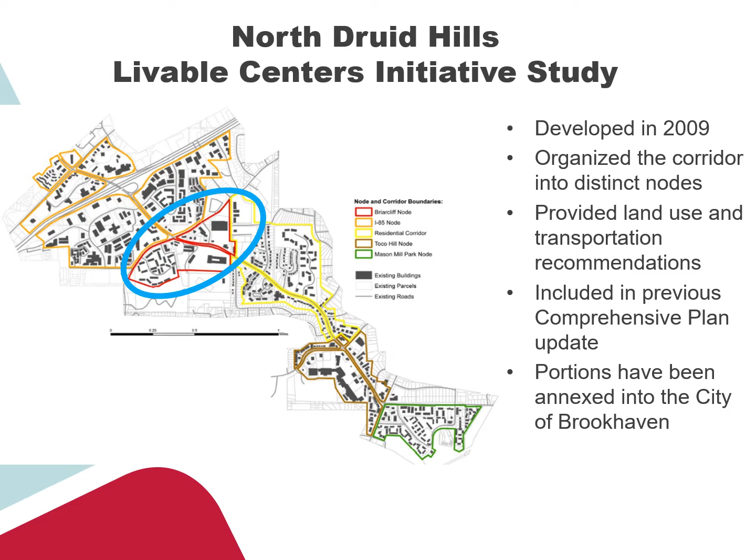The Briarcliff node, as delineated in 2009, included only the area just north and just south of North Druid Hills Road on the east side of Briarcliff. So that includes a series of apartment complexes, the DeKalb County school site, including Adams Stadium, and a series of retailers on the north side of North Druid Hills Road from the Chick-fil-A over to the Target.

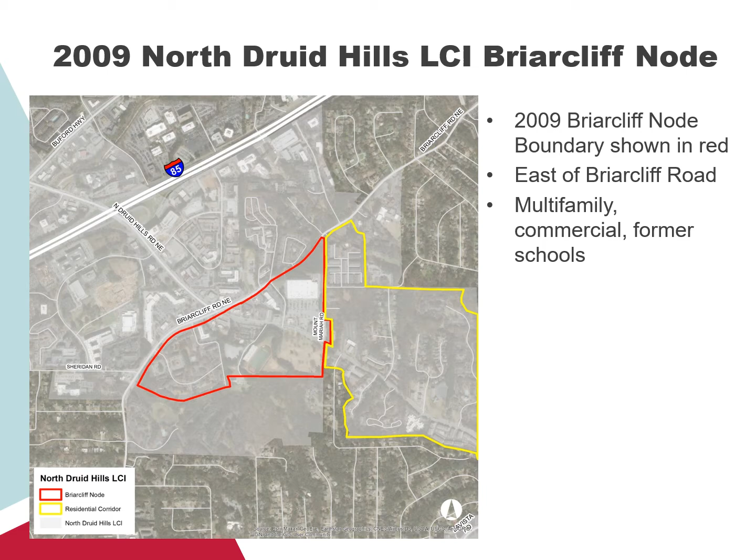Part of the intention of the Briarcliff node in the 2009 plan was to serve as a transition area between higher intensity development to the west of Briarcliff Road and near I-85, and single family neighborhoods that are farther east in North Druid Hills. However, over the last several months, the city of Brookhaven has now annexed much of the property that was in the Briarcliff node.

Those properties that are encircled here in the red dashed line, including the Boston Market and the QT gas station on the south side of North Druid Hills Road, and most of the retail properties on the north side of North Druid Hills Road. So what's left of the Briarcliff node today really is not much of a transition, as the very core of the district is now part of the city of Brookhaven and under the guise of that city's zoning regulations.

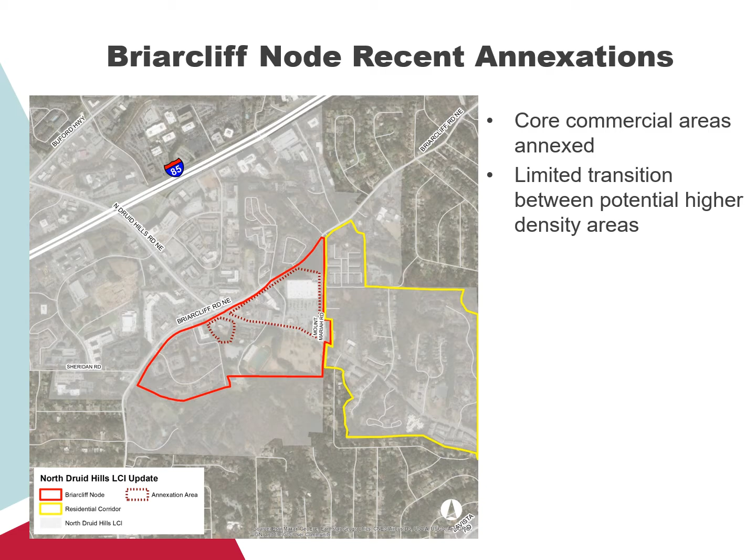So one of the primary objectives of this master plan update is to reorganize the Briarcliff node in a way that it can still continue to serve as a transition area in unincorporated DeKalb County between higher intensity development, most of which is now within the city of Brookhaven, where building heights of 10 stories are being allowed, and higher intensity multifamily development, and that transition to the single family areas to the east.

So what's being recommended in this plan update is to reorganize that Briarcliff node and include properties farther to the south that include Kittredge Park and other multifamily development, as well as a few additional properties to the north of North Druid Hills Road, including the collection of churches just east of Mount Mariah Road and a few of the residential areas that are north of Briarcliff Road that are all sort of encircled by multifamily residential today.

The goal of reorganizing this node again is to establish a reasonable transition area between commercial, higher intensity development west of Briarcliff Road and now right at the intersection of Briarcliff Road and North Druid Hills, and our stable single family neighborhoods to the north, to the east, and to the south.

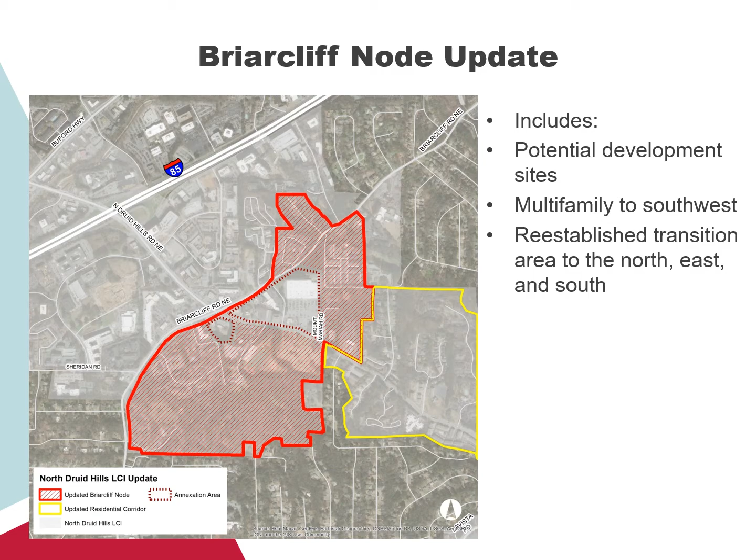This idea of reorganizing and resetting that transition is really apparent when you look at the amount of development that has recently been approved within the North Druid Hills corridor area, particularly between I-85 and just east of Briarcliff Road.

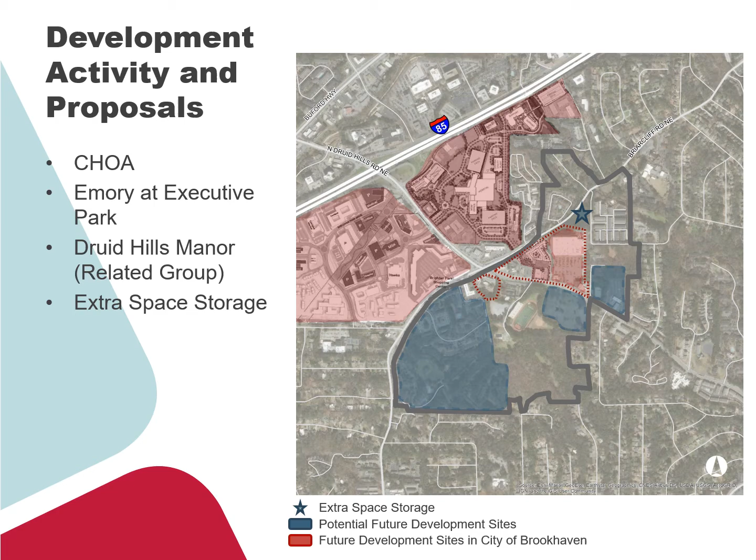The reason for this plan update really is to think a little more forward about these areas that are likely to redevelop over the coming years and reset some community expectations in a way that preserves and maintains an appropriate transition that protects the single family neighborhoods to the north, east, and south, but also creates opportunities that are viable from a market perspective that might prevent or at least encourage some of these properties to reconsider not being annexed into the city of Brookhaven, but remaining in unincorporated DeKalb County.

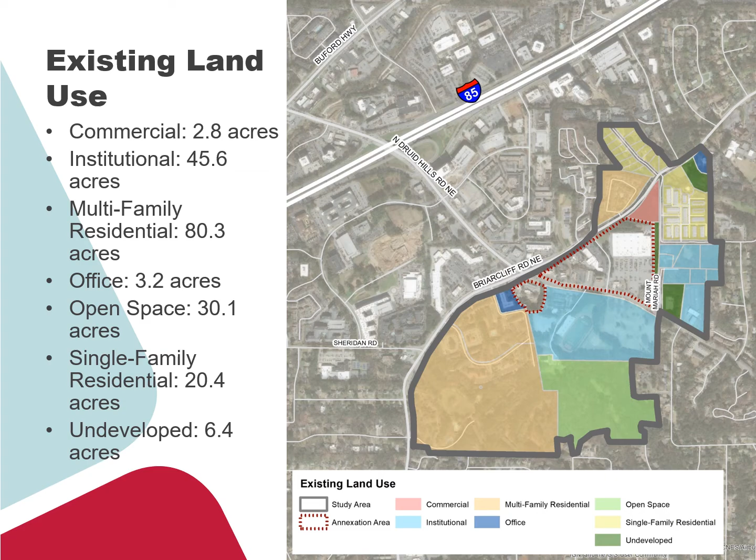Now, in the current DeKalb County Comprehensive Plan, this area, the Briarcliff node, is identified as a neighborhood center. So throughout the area that is the neighborhood center today, development can be 1 to 3 stories in height and up to 24 units per acre for multifamily development.

In working with the stakeholder group that is comprised of neighborhood residents and leaders from the surrounding area, we've really felt like the appropriate path forward is not to codify this as one single activity center, but to have a series of sub areas within it that seek to tailor the needs and the regulations to each specific area within the Briarcliff node. So to do that, we're recommending a series of 5 sub areas.

What's important is that north of that creek and sort of north of Sheridan Road, it probably makes sense that it would not only be multifamily residential, but also include a commercial or an office component. But the stakeholder group has felt strongly that what we don't want to see there is a retail shopping center or a big box strip center.

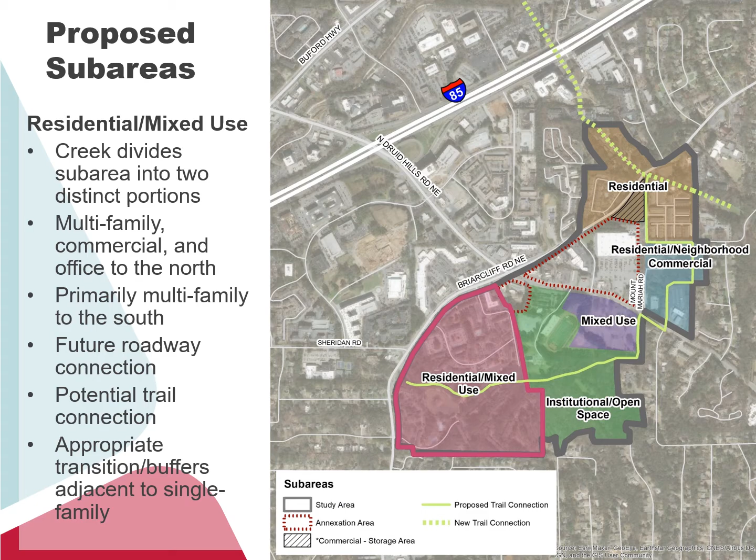While it's not shown here on this particular map, we also think it makes a great deal of sense for the county to work on these properties as they redevelop to provide a roadway connection from the intersection of Sheridan Road and Briarcliff Road through this redevelopment area and north of the creek over to the school site or Adams Stadium, providing a local roadway and potentially a local trail connection for residents to bypass the Briarcliff Road at North Druid Hills intersection and access the south end of Briarcliff Road and the east end of North Druid Hills without going through that intersection.

As we move to the east, the plan update outlines a second area referred to as the institutional and open space area. This includes Kittredge Park, the pool area operated by DeKalb County Parks and Recreation, as well as the Kittredge Magnet School currently and Adams Stadium. The stakeholder group sees this as an opportunity to preserve and enhance institutional uses and access to open space within the surrounding area, again looking for ways to provide trail and roadway connectivity through the site while preserving it as an institutional and open space anchor within the district.

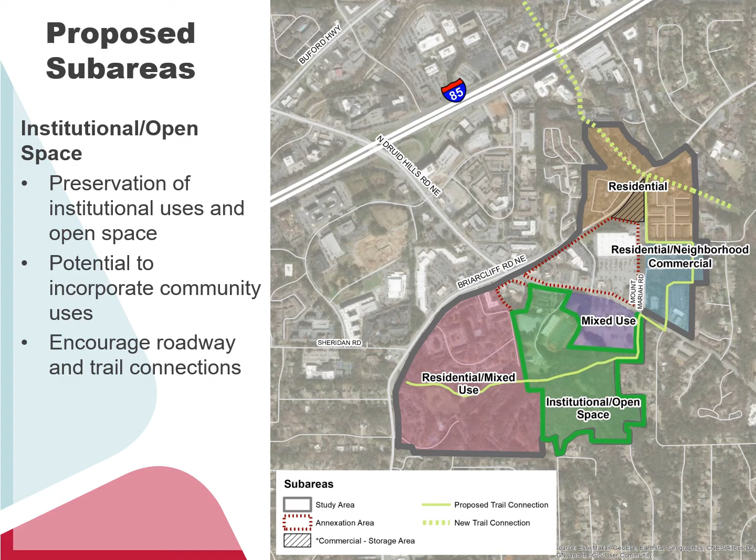Looking at the next sub area, we'd be remiss not to recognize that the prior school site is a potential redevelopment site. There's a lot of history with previous developments proposed in the area, with concern that those were out of scale and character for the surrounding neighborhoods. So, working with the DeKalb County School District and stakeholders, this area is being listed as a mixed use area—a mix of residential, commercial, and office—with recommendations and standards to push higher density toward the west end of that parcel, closer to the stadium and Briarcliff Road, transitioning down as it moves east toward the single family neighborhoods.

To encourage an appropriate transition and buffer to the single family area, we recommend, shown by that green line, that a multi-use greenway trail be considered on the far east end of that mixed use site, to ensure the buffer is preserved between single family homes to the east and the mixed use site to the west.

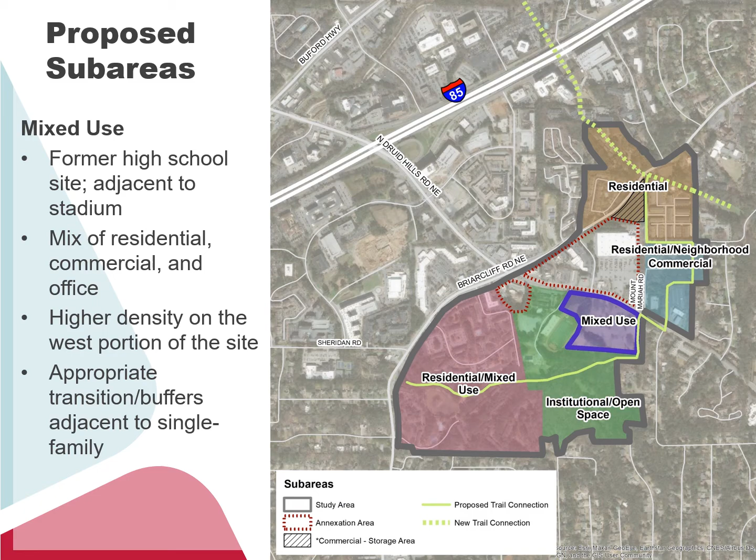As we move to the north side of North Druid Hills Road, the next sub area is shown as a residential neighborhood commercial transition between proposed higher intensity development already permitted west of the target site and the single family neighborhoods to the east. This area would potentially include multifamily development with small scale retail integrated on the ground floor facing North Druid Hills Road, stepping down to attached single family as it gets closer to the existing neighborhoods.

Again, it's very important to maintain appropriate transitions and buffers. So once again, we're using the idea of a greenway trail to separate multifamily development on the west from single family development on the east, tying that back into Kittredge Park, and potentially adding a connection to the north over to the Peachtree Creek Greenway.

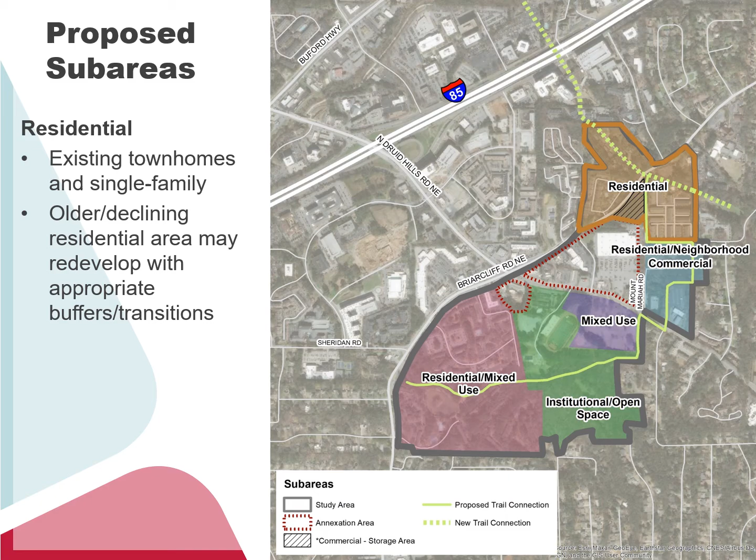The final sub area is the residential sub area on the north end of this Briarcliff node, on either side of Briarcliff Road. The area is residential today, and the reason to codify it as residential in the future is to preserve that transition, whether through existing townhomes and single family homes, or through appropriately scaled redevelopment of aging homes in the area over the years to come. Again, it's important to tie in that greenway idea to create walkability throughout the district and connect Kittredge Park up and around to the Peachtree Creek Greenway.

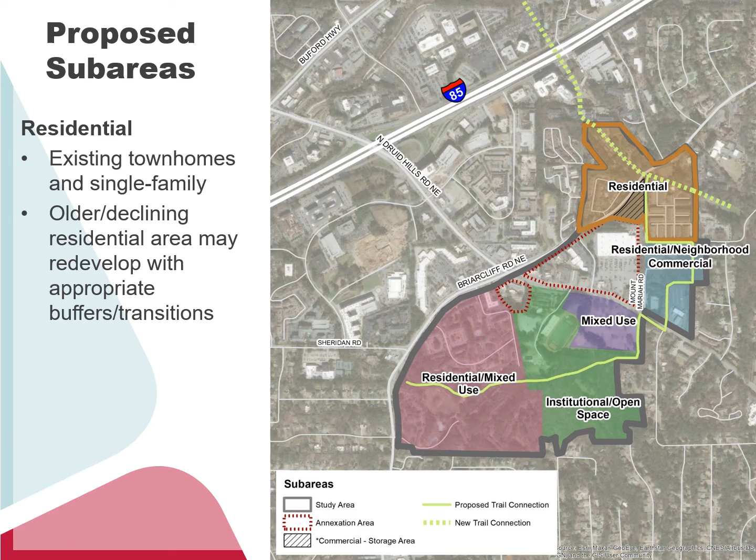While the plan does allow that one more step in terms of density and height, the return for that are the details related to limiting some uses, preserving and enhancing buffers between potential new development and existing single-family neighborhoods, considering new roadway connections as part of redevelopment, and encouraging this greenway and multi-use trail that ties the area together, provides access to Kittredge Park, and creates an alternative to getting in the car for every trip or recreation within the district.

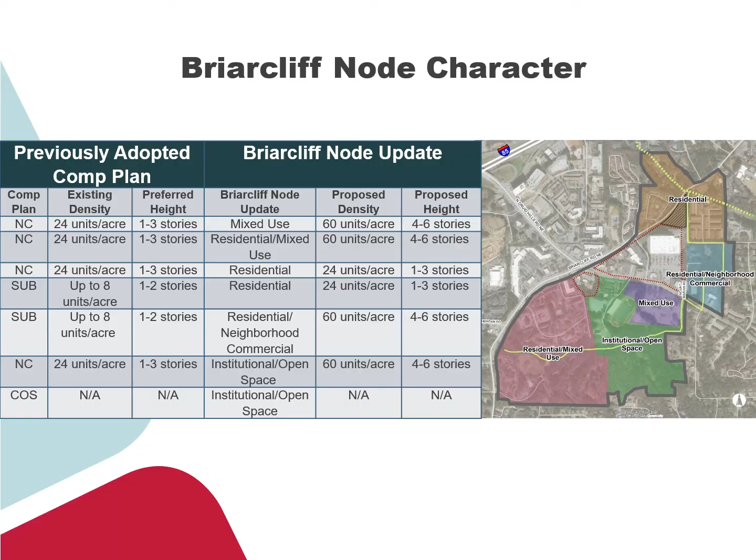The other benefit of updating this plan is taking a fresh look at and reinforcing some of the transportation projects that were in the original plan. One of the most difficult circumstances in this area is the Briarcliff Road at North Druid Hills intersection, which is really the cog in the wheel that limits transportation access and connectivity through the area.

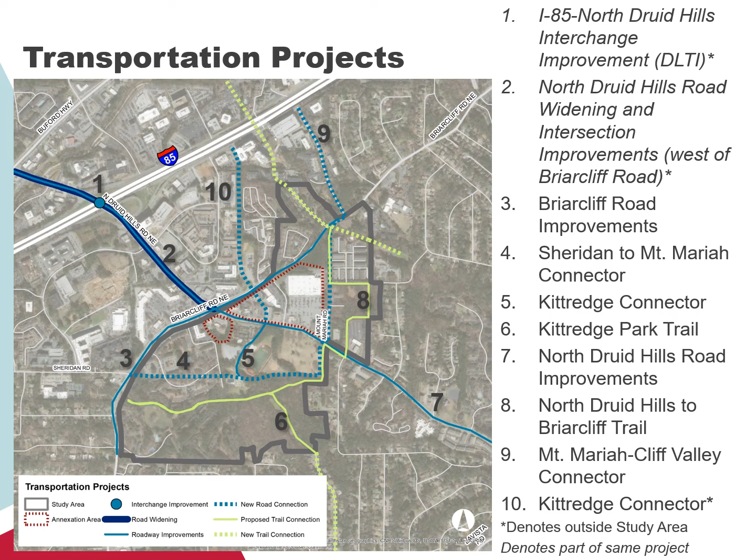So the plan update reinforces recommendations and roadway connections from the original 2009 master plan, including ways to connect the east side of North Druid Hills Road to the north or south side of Briarcliff without going through that intersection. It also lays out the plan for the Greenway Trail and other key roadway connections that could enhance accessibility and connectivity while easing congestion over the long term.

As mentioned earlier in this video, the purpose of this LCI update is focused solely on the Briarcliff node. We have to acknowledge that a great deal of time and effort went into creating the master plan in 2009, which goes from Buford Highway and I-85 over to Toco Hills and Clairmont Road. There are those in the community who would still like to see the entire LCI plan updated and brought into the modern day.

But the reason for this focus on the Briarcliff node is very much because of the recent development, redevelopment proposals, and recent annexation, which is changing the very fabric of the intersection of North Druid Hills Road and Briarcliff Road, and the need to reestablish this transition area before the next wave of development, and to partner with the DeKalb County School District while they're at the table thinking about the future of the school district site and the old high school.

So we've put together this draft document, again with the help of area residents, neighborhood leaders, and stakeholders, to create this short-term plan update for the Briarcliff node. We've held a number of stakeholder meetings and appeared before the District 2 Community Council in early February.